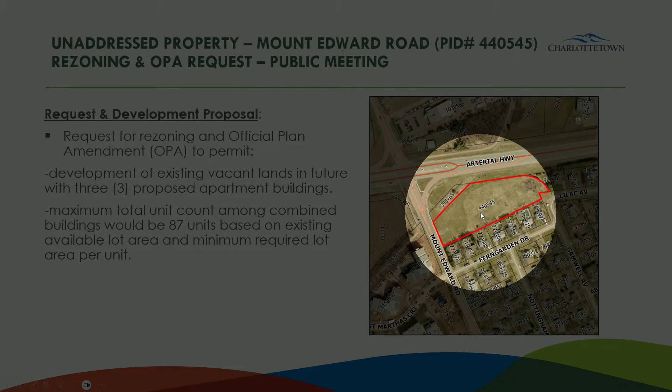The subject property is shown on the screen here, in a 2023 air photo, at the southeast corner of Highway 2 and Mount Edward Road. The existing lot is vacant and undeveloped, located at the edge of an established neighborhood in Mount Edward Ward, Ward number 6. The lands are currently within the R1L zone and are bounded to the north by the bypass highway, to the west by Mount Edward Road, and to the south and east by existing low-density residential development. An existing easement is present on the property, registered in favor of the City of Charlottetown with respect to buried public infrastructure.

The requested rezoning and official plan amendment are intended to facilitate future development of 3 apartment buildings having a combined maximum total unit count of 87 apartment units based on available lot area. The proposed apartment buildings would be within existing height limits prescribed by the related R4 zone, and no further relief from standard zoning requirements for apartment buildings is anticipated at this time based on the current concept.

And there is a copy of the scaled site plan which shows what the proposed development is intended to look like based on a bird's eye view.

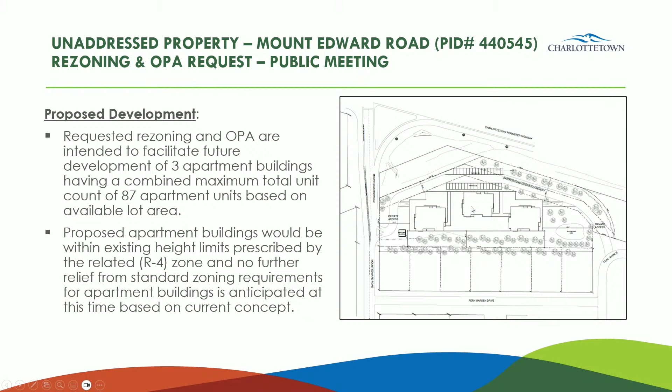With respect to zoning bylaw and legislative requirements, as per section 3.10.3 of the zoning and development bylaw, before amending the regulations of this bylaw or rezoning any parcel of land, council shall conduct a public meeting to receive the views and opinions of the public and the applicant. Council may, for reasons that are in the best interests of the city, reject a proposed amendment to this bylaw without public notice and without referral to a public meeting.

In accordance with Section 3.10, amendments to the bylaw and rezonings of the Zoning and Development Bylaw, on February 6th, 2026, notice of the public meeting was circulated to 32 surrounding property owners within 100 meters, 328.1 feet of the subject property, advising them of the public meeting this evening on February 19th, 2026, and to request any comments and feedback concerning the proposed rezoning and official plan amendment for the subject property identified as PID number 440545. As of this moment, we've received a total of 26 responses, all stating opposition to the application.

I've left that tally highlighted as the Deputy Mayor noted. We are still able to take in official comments up until noon tomorrow, Friday, February 20th.

Again, this is a scaled site plan of what the proposed development would look like. There's proposed to be a right-in, right-out access onto Mount Edward Road to the west over here, and then a 2-way private access, both in and out, connecting to Lilac Avenue on the east side of the site, and the 3 proposed apartment buildings with parking located to the north as shown here.

The next slide is a concept rendering of what the buildings would look like. Again, this is just a concept, and should the amendment be approved and this development go ahead, this could be subject to change through a future building permit process. But this is what the applicant has provided, just to provide a sense of what the development would look like. This would be viewed from the north looking south from the bypass highway.

Just to conclude, the next tentative steps in the process following tonight's public meeting would be a recommendation to Planning Board on Tuesday, March 3rd, followed by a recommendation to Council on Tuesday, March 10th. But those are tentative dates pending the outcome of tonight's meeting, and I'll turn it back to the Chair for any further discussion and presentation. Thank you.

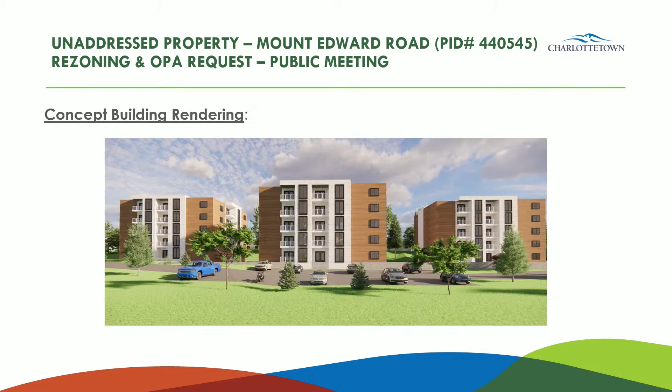Have any comments from the public?

Okay, and do you want to just state your name for the public record? Dana Blakely. Come on up to the podium there, please. I don't do well with the microphone. Oh, that's okay. My own voice, it's but okay, that's fine. It's for the public record. Dana Blakely. Yeah, thank you. Go ahead.

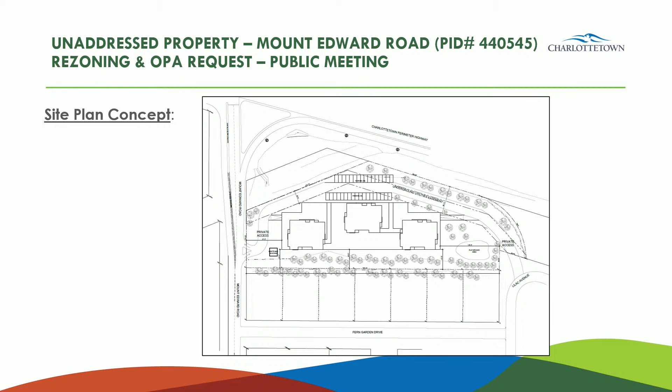I'm asking the planner, David Gundrum, the Planning and Heritage Department, City Council, Mayor Philip Brown, to deny the request for rezoning of property identified as Mount Edward Road, PID number 440545, from the single detached residential R1L zone to a comprehensive development area in order to allow for the future development of the property with 3 apartment buildings having a combined total of 87 dwelling units.

Numerous concerns regarding the rezoning and building of 3 apartment buildings exist, including, but not limited to, infrastructure costs and prioritization of current neighborhood needs, increased traffic potential for 150 to 160 vehicles, speed, congestion, and hazards, loss of privacy, effect on property values, noise and air pollution, environmental impacts, and more.

My family has resided in this neighborhood since July 2003 and paid property taxes much longer than the developer, who took ownership of the land, I believe, in 2008, 2009. We have established rights for services and consideration first.

This neighborhood is in desperate need of road and street repairs, resurfacing, installation of sidewalks, street lighting, speed radar signs. A previous application was submitted requesting a speed bump due to increased traffic and speeding along Fern Garden and Lilac Avenue. This rezoning and development will require infrastructure dollars, time, and manpower to add street lighting, culverts, water and sewer, piped storm water systems.

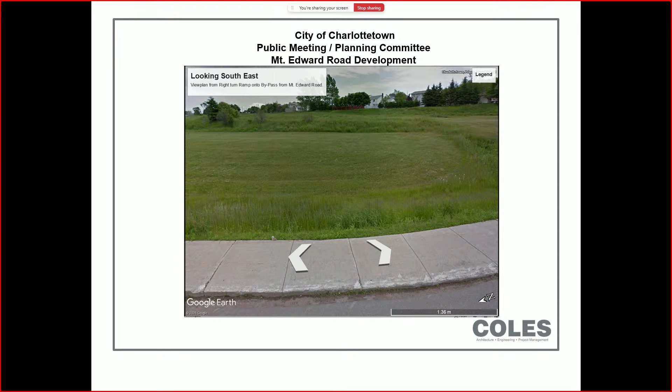The development land sits approximately 15 to 20 feet lower than the existing residential properties to the south and east. That means that even though these buildings are 5 stories, their perceived height and visual presence from the neighborhood is reduced because they are set down into the landscape rather than built up to the same level as the homes. This natural change in elevation provides an important buffer, and allows the project to be screened with thoughtful landscaping and tree planting to soften views and strengthen the transition between existing homes and the new buildings.

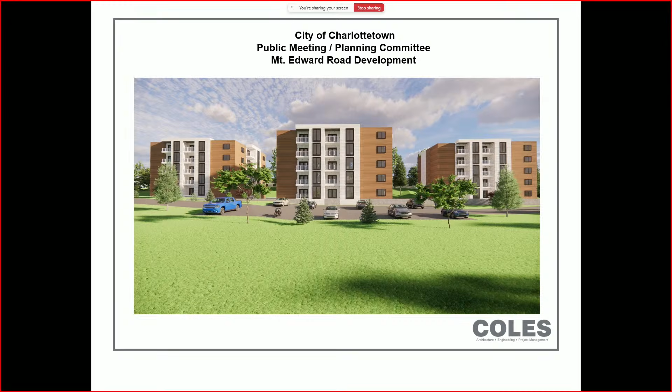Next slide, please. This view reinforces how view planes and spacings have been retained, and how the site landscaping is intended to frame the buildings rather than overwhelm the area.

In closing, I wish to emphasize that this proposal is intended to provide much-needed housing in Charlottetown while still respecting the existing community. The design uses the site's natural topography, building orientation, spacing, and landscaping to reduce impacts on neighboring homes. It provides senior-friendly housing with modern amenities, secure access, underground parking, and energy-efficient building systems, all in a location close to transit, services, and healthcare.

Thank you for your time this evening. I welcome any questions and appreciate the opportunity to converse with you and hear feedback. Thank you. Thank you, Doug.

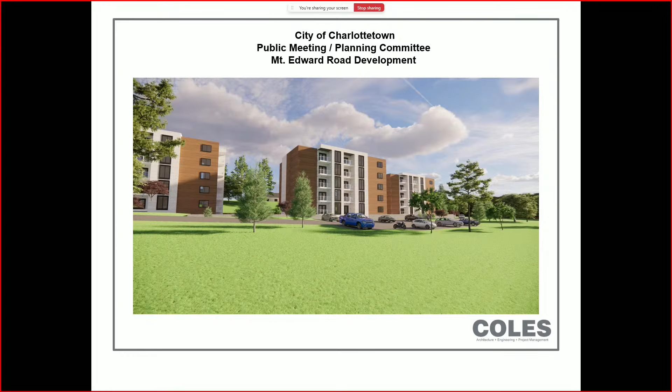Robert McDougall, before I go up there, I just have a real brief thing, whatever this hasn't been brought up. With the proposed extension of the road from Canadian... I will still need you to be on the record, if you wouldn't mind.

Thank you. Yeah, Robert McDougall, just wanted to bring to the point that a lot of the people in that neighborhood are really concerned with the extension of the road coming from Canadian Tire up to Ash Drive and how that's going to impact all the traffic. And now with this, putting these apartments in there, whatever, how that's all going to flow with all that. So that's the only thing I just wanted to bring to the attention, is that you have that project going on with unknown results, and then you're going to have these apartments. So, thank you. Thank you, Rob.

Adam McDonald, resident. Thank you. Thank you for inviting us to this beautiful room and preserving the character.

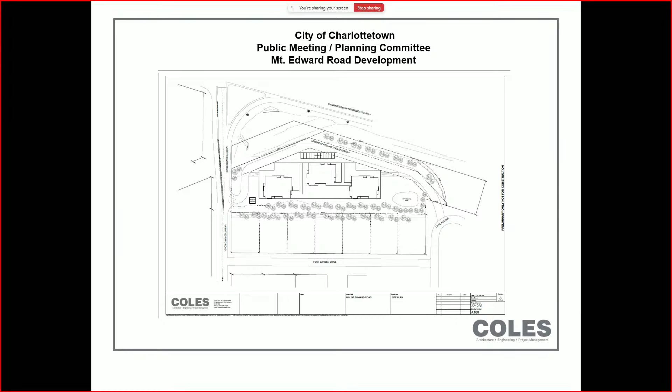So I'm wondering, is that going to be restrictive? If that is how it looked—well, that's what it looked like to me in one of them—if you're going to have another flow of traffic from Spencer Avenue onto Ash, and this onto Ash as well, is that what you're hoping? No, well, I think it might have been in the Coles one, but it did show this, it did have arrows. Anyway, I just asked a question.

I want to reiterate, we've been in Fern Garden for nearly 33 years. When we looked at the house, we asked our realtor, David Corrigan, what is this land—is it going to be an asphalt plant, or whatever? No, it's a single family dwelling, no problem. So we moved in and we've been there for 33 years.

I'm telling you, if you put an access onto Lilac Avenue, my grandchildren will not be able to cross the street to the park right next to this gentleman's house. Right now we walk them across—they're 9 and 7, and it's the little kids' park. I'm telling you, if people can't turn left onto Mount Edward Road, everybody will use that access, because unless you want to go to the highway, go to the liquor store this way, or go to the QEH that way, people are going to come there, come up our streets, and head into town.

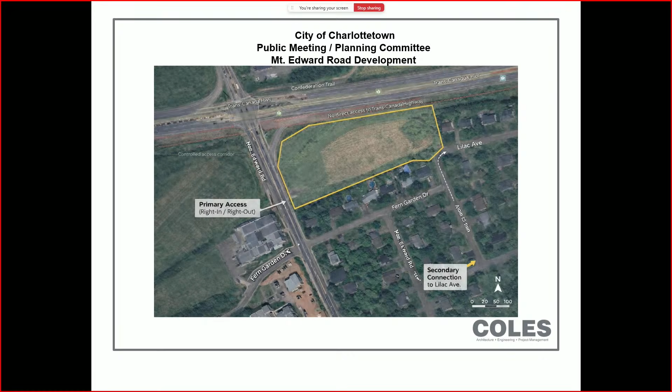Do we have any questions? Oh, okay, I was hoping to get out of it. I'm Pam Josie, and I live at 9 Fern Garden Drive.

As you look at those buildings, you have one setback, one a little bit forward towards the highway, and another one set back. That building that is set back is right on our fence line. I know you talk about the grading drop, but I don't even think it's 15 feet. I know everybody's saying it's 15 feet, but I don't think it is.

The other thing that has been mentioned is property valuation. When we think about putting high-density apartment buildings in a residential area, it's going to significantly devalue our homes. The traffic has been mentioned already, a lot of my points have been mentioned already.

But I do want to say, with 87 apartments or units, with an average of 6 or 7 daily trips—this is just some research I had done—with peak hour trips, it's projected that we'll have about 35 to 50 extra cars on the road during peak hours in that little neighborhood, along with the school buses. And in the run of a day, about 500 to 600 vehicle trips on those roads, in addition to what's already there.

Many years ago we put in requests to have the traffic looked at, and it wasn't adequately looked at. They would come out and put up a radar, people see it and slow down, the radar gets taken down, and the same thing happens again. Fern Garden, Lilac—there are a lot of kids on those roads, Lilac even more so now. That turn has been talked about many times.

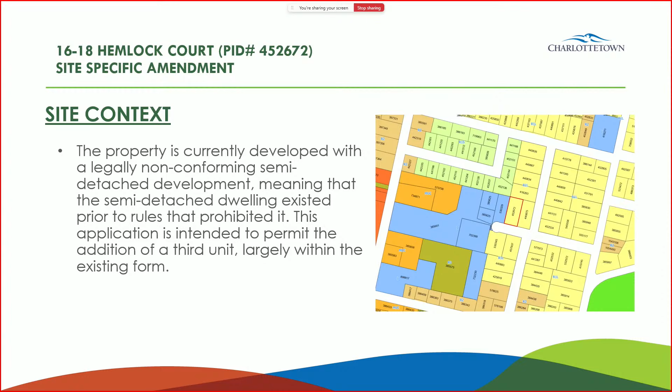This application is intended to permit the addition of a third unit largely within the existing form. I just want to quickly note that this third unit cannot be considered a secondary suite because it is in a semi-detached dwelling, and that is currently not permissible within our bylaw.

As seen in the proposed site plan, the proposed development will occur largely in the form of the existing building, with a bylaw compliant rear addition for, I believe it's an entrance and one room on the main level. Parking is intended to be provided via existing driveways.

As per section 310.3 of the zoning and development bylaw, before a site-specific amendment for any parcel of land, council shall conduct a public meeting to receive views and opinions of the public and the applicant. Council may, for reasons that are in the best interest of the city, reject a proposed rezoning without public notice and without referral to a public meeting.

But if the application goes to a public meeting, then council shall determine the disposition of the application, and the applicant may not be allowed to withdraw the application after the public meeting.

On October 19th, 2025, council approved a request to proceed to public consultation. This meeting has been, I believe, twice delayed due to weather, so this is the first meeting that has occurred since then. As per section 310.4 of the zoning and development bylaw, a mailed notification letter was sent to owners within 100 meters, a minimum of 7 calendar days prior to the public hearing date, and that was done on February 6, 2026. A total of 25 letters were sent to residents advising them of the public meeting to solicit their comments and feedback, and to date, no written responses have been received.

Okay. All good, Counselor? Yeah, so

I apologize, I don't fully understand the legal stuff. So in other words, we're not changing the zoning of this property? No, it's already non-conforming, legally non-conforming. And so as council, we're gonna vote whether or not we support this extension.

In terms of the legally non-conforming status, when we amend anything that has been grandfathered in because it existed prior to the bylaw, amending something that was already not meeting its current zone, which is R1L, triggers us needing to come in for a site-specific amendment. Which is why it's here, to permit that extension beyond what was legally non-conforming or grandfathered.

And does 18 inherit that too? No, it would be for the third unit only. It wouldn't be like a rezoning that would give new land rights. It is specifically written towards the proposal at hand.

Thank you. No worries, a little bit confusing. Counselor Twill, do you have a question, clarification? Okay.

Tell me what the difference is between site-specific and spot zoning. Our bylaw doesn't use the term site zoning or spot zoning in this way, I can't think of a use of it in our current bylaw.

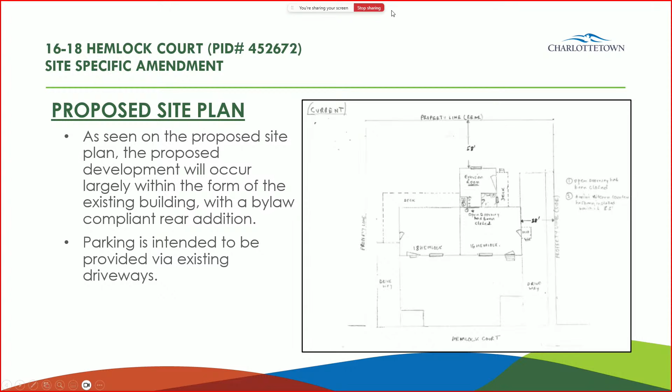Councillor McCabe or Deputy Mayor, any questions on this application? No? I'm good as well, Councillor Bernard. Okay, thank you. Thank you, Michael. Thank you again, Dave.

We'll move to the last application, the rezoning of Lot 8, Violet Circle. I believe Sonia's online.

Sonia? Can you hear us? Yeah, I can hear you. Okay. Can you turn that up a little bit? It's hard to hear. Yes, there you go. Okay, you have the floor. Okay, thank you.

This is a request to amend Appendix A, the future land use map of the City of Charlottetown official plan, from low density residential to medium density residential, and amend Appendix G, zoning map of the City of Charlottetown zoning and development bylaw, from low density residential single R2S zone to medium density residential R3 zone, to facilitate the future development of a proposed 4-unit building, a stacked townhouse at Lot 8, Violet Circle, PID number 1187913.

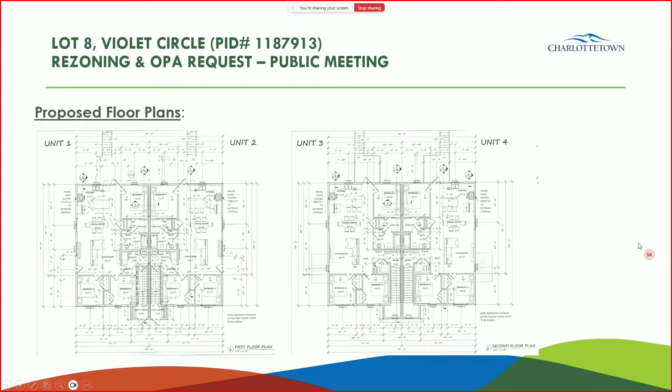This is the site plan and floor plans. This is a concept rendering. Next step would tentatively be the planning board on March 3rd, and then it would go to council on March 10th. This is the end of my presentation. I can answer any questions.

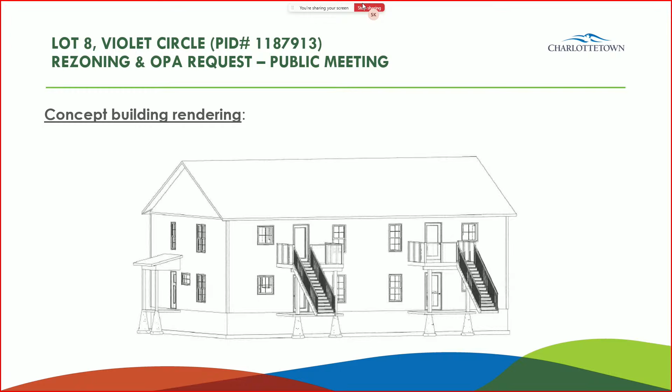Thank you, Sonia. Any comments or questions from the public? Seeing none, any clarification from council? Councillor McCabe? Nope, just another rezoning in the new subdivision. Deputy Mayor Jankov? I'm good too.

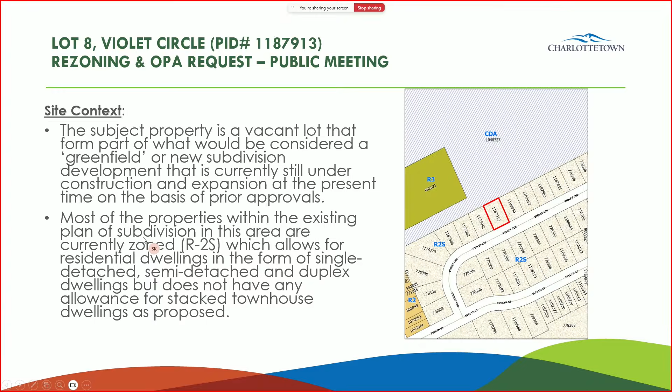Go ahead, sir. I just want to say I'm here representing this proposal, and if there's any questions I'm happy to answer them. Could you state your name? Tyrell Doucette. Ty. Okay, thank you, Ty. It doesn't appear there's any questions. Councillor Twill, you have a question or clarification?

Tyler, how does what you're proposing blend in with the adjacent properties? Actually quite well. They're all duplexes built there now, and there's been approval of at least 6 that are built right now, 2-story stackable 4-unit buildings right across from my lot there.

You're closer to that mic, we're not picking you up, sorry buddy. It blends in well, as there's already lots of new construction duplexes there, and approval for probably 6 stackable 4-unit buildings already under construction, including right across from the proposed lot. What would you say the majority is if you drew a circle around there—pretty much all duplexes or more? All brand new construction duplexes and 4-units now. Okay, thank you, Tyler.